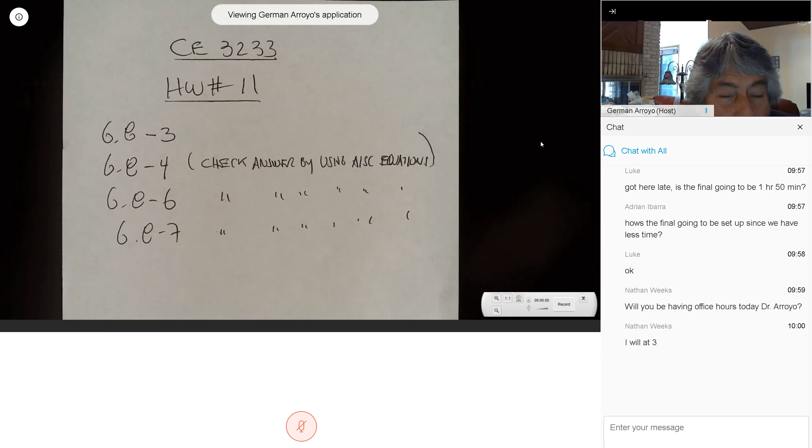So I'm going to give you two problems in the final exam. I am writing the problems, and the problem that will take me the longest to solve, I will give you the longest time. So probably one problem is going to be an hour and 10 minutes, and the other problem is going to be 40 minutes, because we only have an hour and 50 minutes.

I'm going to design the exam for you to take less than that time, but usually some of you are slow. But we had no choice. We had to follow the schedule and the time. I cannot give you more than 1 hour and 50 minutes.

You need to look at the other courses, because many of the professors do not know that the university had changed the date and the time. So there should not be any overlap in your final exams. It shouldn't. But if you have any overlap, go and talk to the other professor, because I was the first one that told you about it. Any question before I continue?

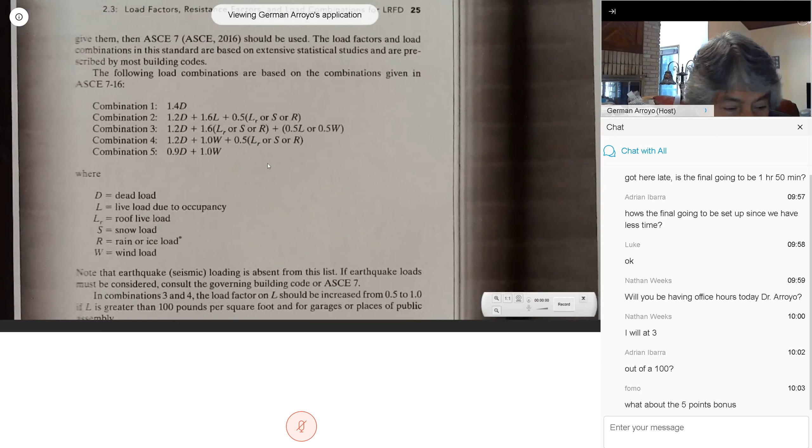One of the homework problems due today gave you the wind uplift. The wind uplift is negative, so in the load combination it goes as a minus. As you probably figured out, for that problem the combination that controlled the design was combination 3.

This is in chapter 2 of the textbook, and I gave you a copy of this page at the beginning of the semester. You're probably already forgetting about that, but for that homework problem, this is the load combination that controls.

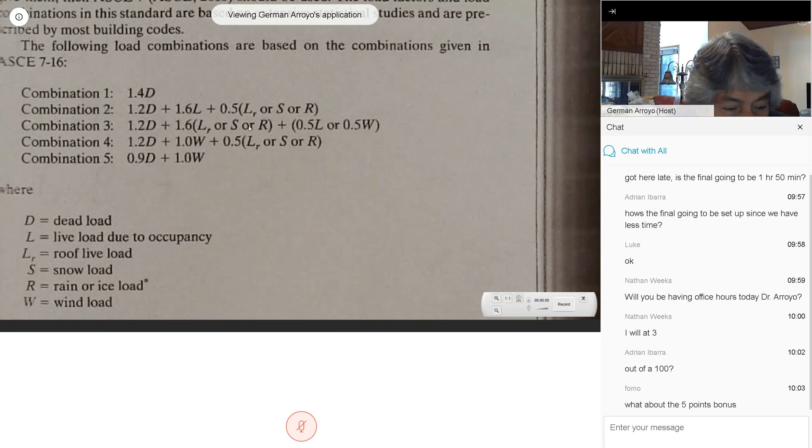You have to be careful, because for instance 1.6 times the live load of the roof, or rain—so here it's 'or'. The same here: 0.5 of the live load or 0.5 of the wind. This could be several cases depending on the loading, but 'or' means you cannot use those two, or three, together. This or that—that's what 'or' means.

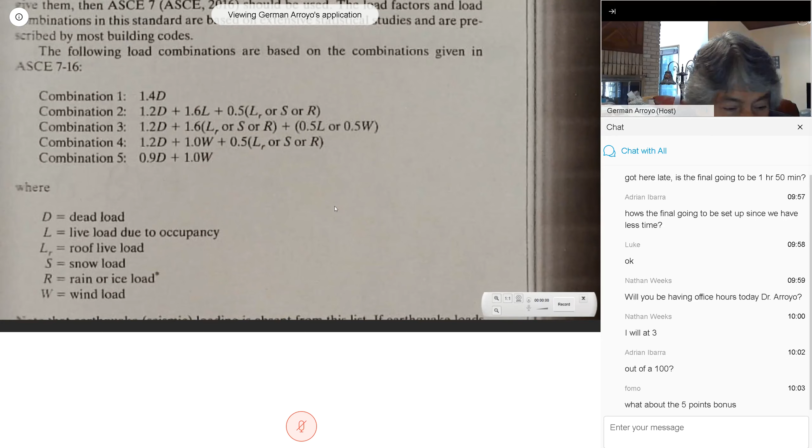So several people asked me about this. I just want you to understand that the wind in this problem is given as a negative pressure because it's trying to uplift the roof in the opposite direction from the gravity load. Don't forget that this is why you have to look at the 5 possibilities. It's not in the code anymore—they removed it—but it's in your text.

I'm going to finish today what we were doing last week, and after that I'm going to start doing beam-columns.

Somebody asked me during the weekend if, for a standard section, you need to compute L sub P and L sub R. If the section is standard, you just go to chapter 3, table ZX, and get the value of L sub P and L sub R from there.

Some of you are taking the course again because you like it, but I didn't teach last semester. Last semester they were computing the value of L sub P and L sub R all the time. If you have a standard section, you just go to chapter 3, table ZX, and find the value of L sub P and L sub R.

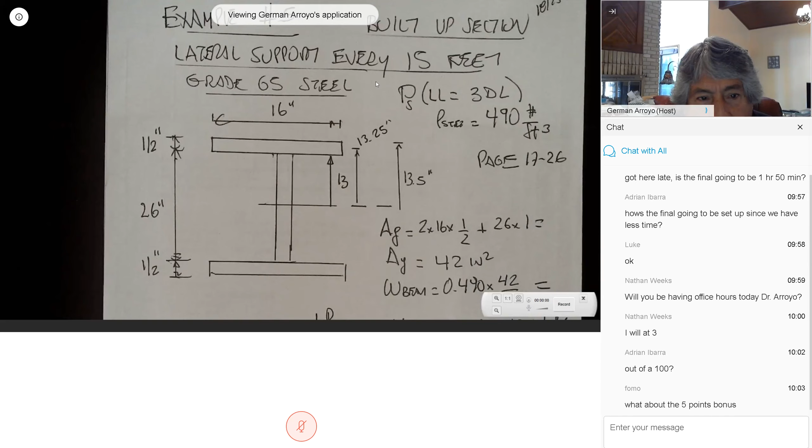This is the last case I'm going to do: a beam with lateral support every 15 feet. I showed this beam before we discussed lateral support. If you compare this problem with the one in the previous chapter, it's exactly the same—the only difference is that now the lateral support is every 15 feet. So the answer, of course, will be different.

But this is a typical built-up section. I know 99.99% of you know this is not in the code, but for the 1% that doesn't, I want to reiterate: this is not in the code, this is not a standard section. So everything needed to solve the problem has to be computed. And this is very simple.

There are 3 plates. This plate is 16 by 1/2. This is 26 by... what was the dimension of this one? Let me see.

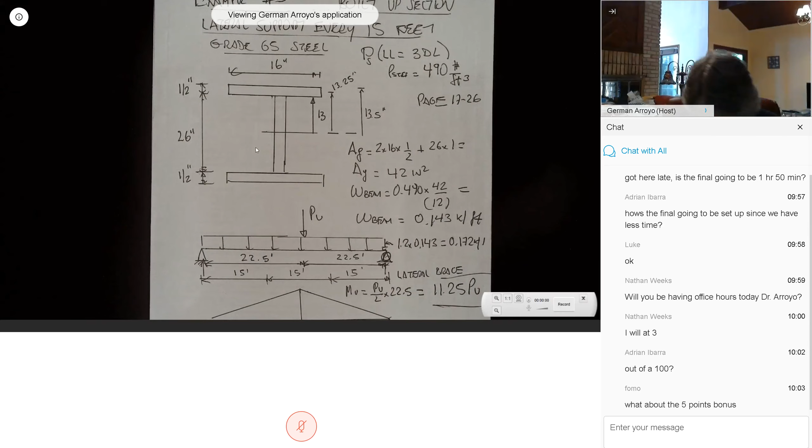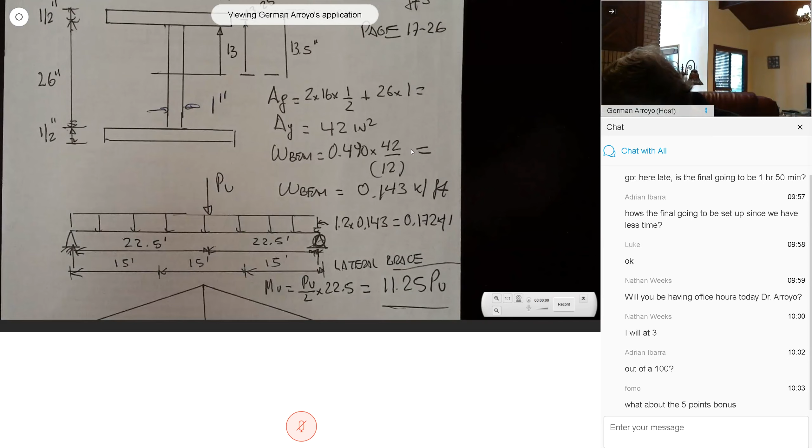Also the thickness of this is 1 inch, of the web. In here, the area in exam number 2, nobody had a problem computing area. This in here is the density times the area divided by, in here there is a mistake, it should be 12 square. The answer is correct, this is 0.143 kips per foot.

So this is the weight of the beam. And in this beam there is a load like before, the PU. So this reaction is PU divided by 2. So the moment is PU divided by 2, but L in here is 45. So this is L sub B, this is L to B, and this is L to B.

We already discussed this before. The critical section is going to be the one in the middle, because of the largest moment, or both of them. MU is the one produced by the point load, and this is the one produced by the weight of the beam. It's a larger moment.

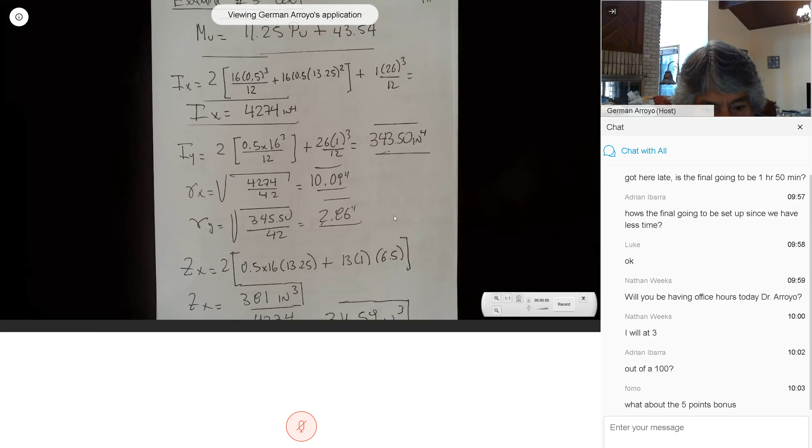I sub X, no problem. A couple of you have problem computing I to X for example number 1, and I don't need in here too many computations, but I do need I to Y. R to X 10.09, R to Y 2.86. This was a new computation, Z X, just to refresh your memory.

To compute this ZX value, we divide this into 2 sections. So it's going to be this area and the distance from the centroid to the neutral axis, times this area and the distance from the centroid to the neutral axis, times 2.

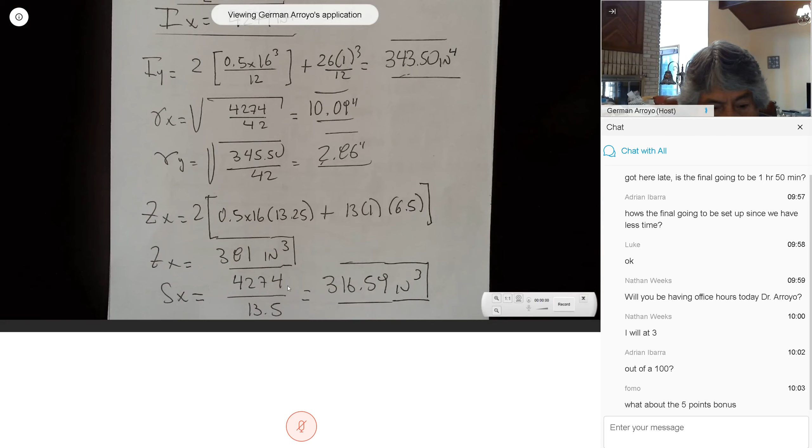And this is what I did the other day. Always, this is the plastic modulus. The elastic modulus is IX over little c, and little c is this value here. For the compression and the tension, the same value.

So what we had in here is the plastic and the elastic modulus. Always this is larger than this value, because like I mentioned the other day, the ratio you get dividing this by this value gives you the reserve capacity, how much the moment will increase when it becomes the plastic moment. And by the way, this number divided by this number is called the shape factor, letter F.

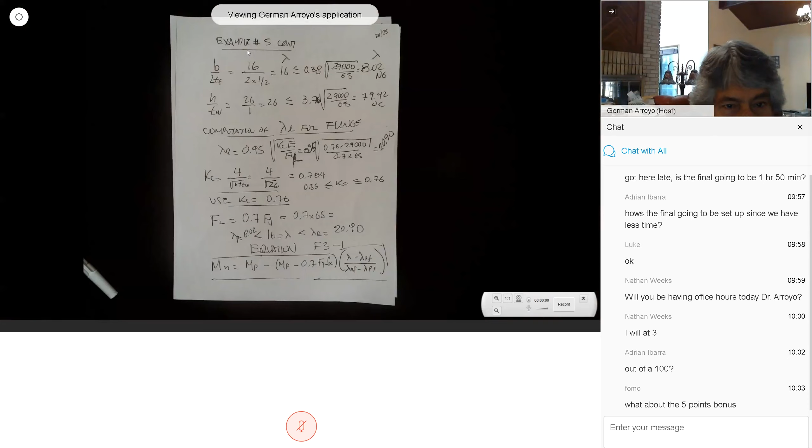We always need to check the flanges and the web. In this case there is the value, the 16 is larger than 8.02, so not good. It means that we had a problem with the flange. If we look at the web, H over TW means that there is no problem with it.

So I was saying the other day, and I want to point out again, don't get confused. They asked me during the weekend about this table. Remember, this table B4.1b is for the beams. The previous one, this table in here, this is for the column.

So for the column, this is lambda, this is lambda sub r. But for the beam, whenever we look at this, with all of this, it's lambda sub p, lambda sub r. So our value of lambda is larger than lambda sub p. We need to compute lambda sub r.

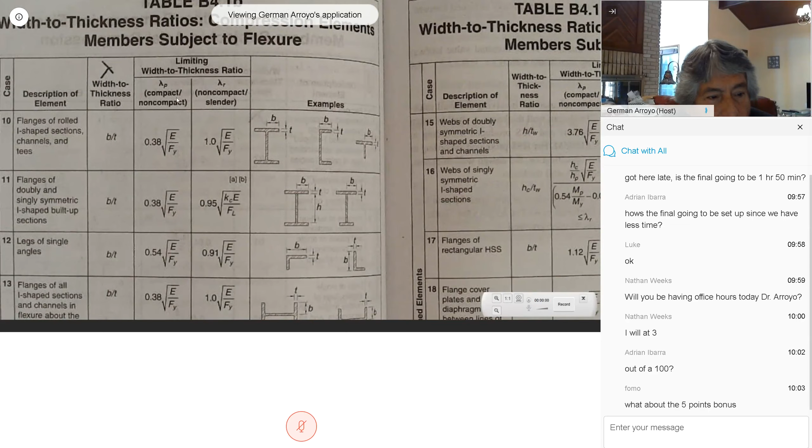But our case is this one, because this is a built-up section. In exam number 2, some people are using the one on the top for the built-up section. This in here is for a standard section. This is for our built-up section.

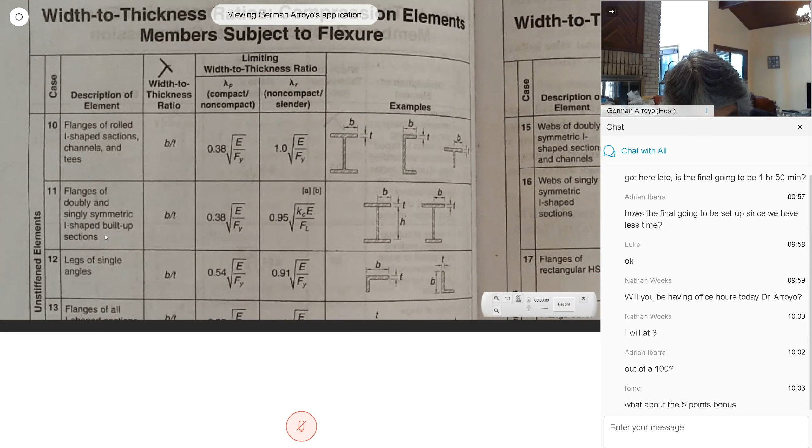So we have to find the value of K sub C, that most of you know where to find it, and the limitation. F sub L is a new value, and I mentioned the other day in here that this is the elastic section modulus for the tension side, and this is for the compression side. I asked you the question the other day and you gave me the correct answer. In our case, because of symmetry, it is equal to 1.

So don't forget that this table is for B. So here on this page, and on page 20, I computed the value of lambda sub r at 20.90. This is the value of K sub C that you computed before.

And so we had our situation that our lambda for the flange is larger than lambda sub P, but less than lambda sub R. So this is the equation that controls our design.

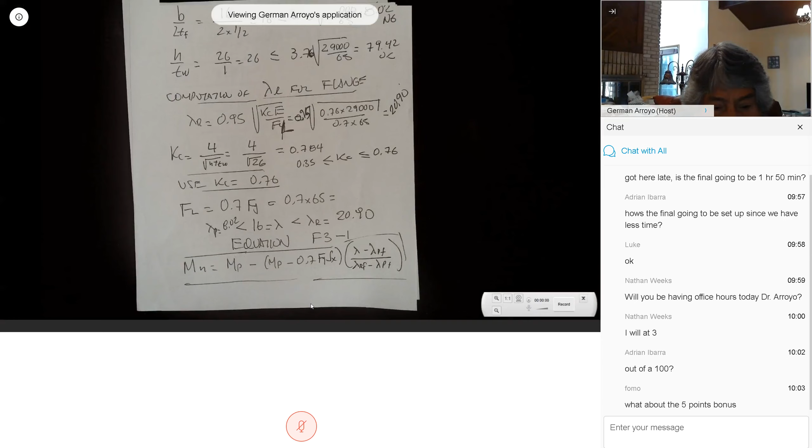And this in the code is page 16.149. I asked you before: don't forget to put in here that lambda sub P is smaller than lambda sub R. This is the formula that controls.

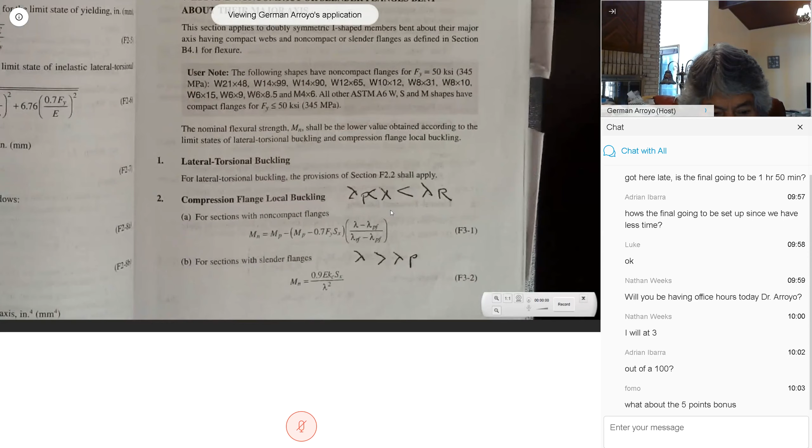Of course, this is going to be smaller than M sub P, because from M sub P you're subtracting all of this value. Be careful with your computation, because sometimes we're not paying attention and it comes out larger than M sub P. It cannot be larger than M sub P because we're subtracting from the plastic moment all of this.

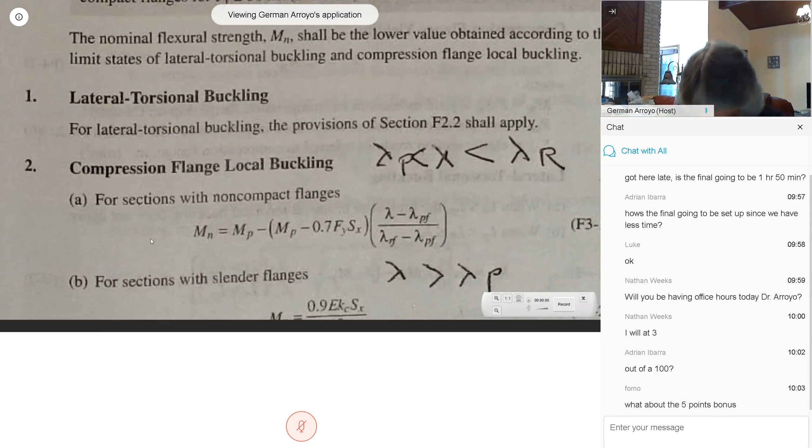I'm going to go back to one of the homework problems, because during the weekend they also asked me this question. One of the homework problems that is due today, this came out larger than lambda sub R.

When you go to the chart and hit the curve that gives you the answer, you're going to see that it's no longer horizontal or a linear equation, it becomes a parabola. So by looking at a parabola, you know which equation controls. But whenever we had the value, like in our homework problem, larger than lambda sub R, it means the elastic equation will control.

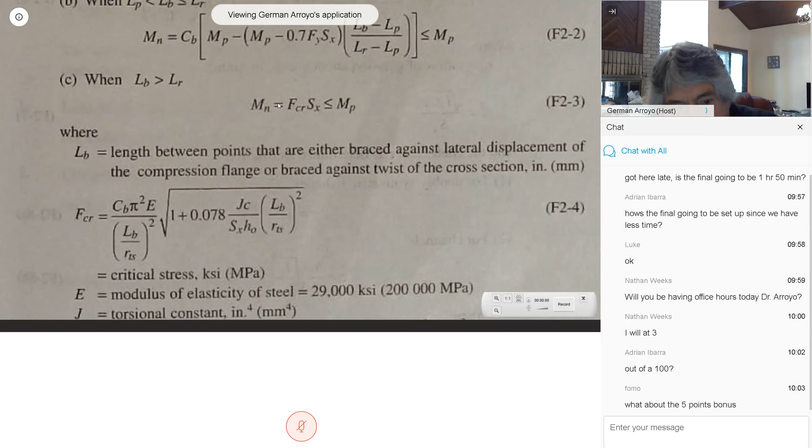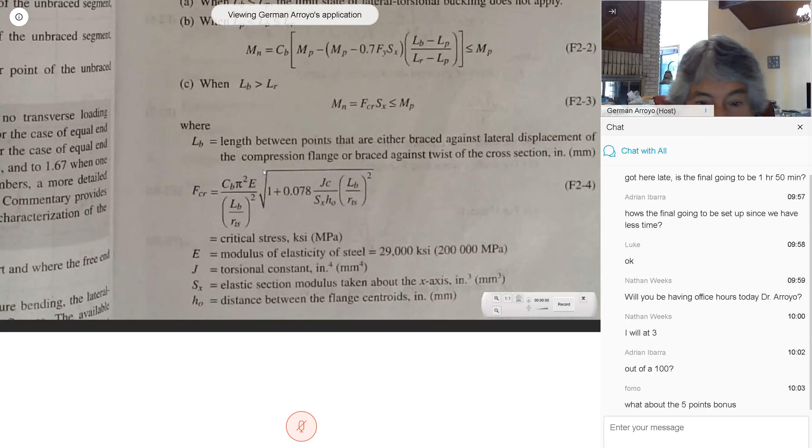Please be careful, because in the past, in a final exam, I gave a problem that requires you to use this equation. This equation's critical stress is computed by using this value, because we are designing a beam. But in that final exam, many people, instead of using this value for the critical stress, they went to the previous chapter.

And they used this equation to compute critical stress. Why for the homework problem can we not use this equation? Why for the homework problem can we not use this equation? Anybody? Because this is for a column, and that is correct.

But in that final exam, many people—I went through the same thing I'm going through today, asked the same question, they gave me the right answer—and in the final exam, they used the wrong critical stress. They went to the back of chapter 4, and they found it not. So just a clarification from the homework problem that is due today. So, what it means...

I do know that you're trying very hard. I just want to share this information with you because it's not only because we had online exams, online lecture, when we were face to face—the same problem I repeated 100 times, and they did the wrong thing.

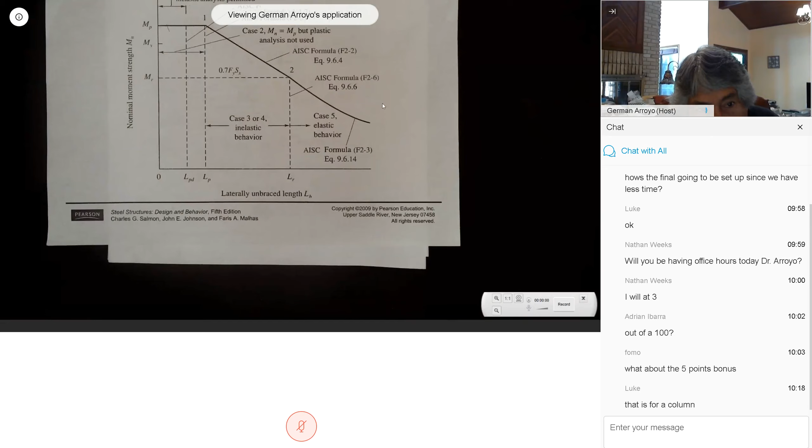So look, whenever we have a beam, laterally braced, there are three equations, and these are plotted for you. When brace length is smaller than L sub P, this equation controls: phi M sub n equal to M sub P. Whenever, as in most homework problems, it falls between L sub P and L sub R, this equation controls—it's a linear equation, and that's the one that uses C sub b.

But whenever we have this equation, when brace length is larger than this value, this is the equation that controls. This is the equation that has the critical stress. So please don't make the mistake. Well, this was just a clarification for some of you.

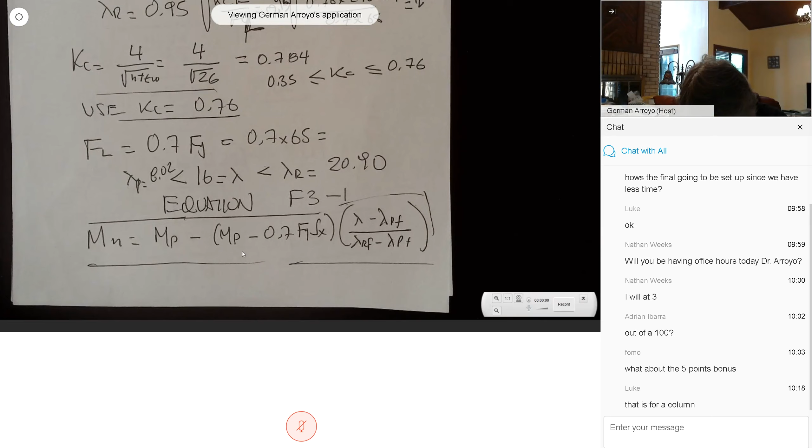This M sub P is not in the code because this is a built-up section. So you cannot find this in the code for a built-up section. But we already have a value: this is ZX times Fy divided by 12.

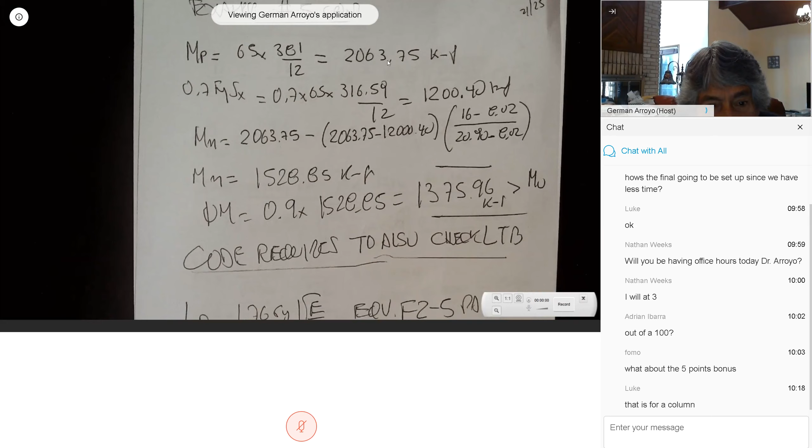This is my plastic moment. M sub R equals 0.7 FY SX. We already computed this value because IX divided by little c—you can see here that it's always larger than this value. Always check your numbers. And this is the nominal design, or the design strength, nominal strength: M sub P minus M sub R, times lambda minus lambda sub P, over lambda sub R minus lambda sub P.

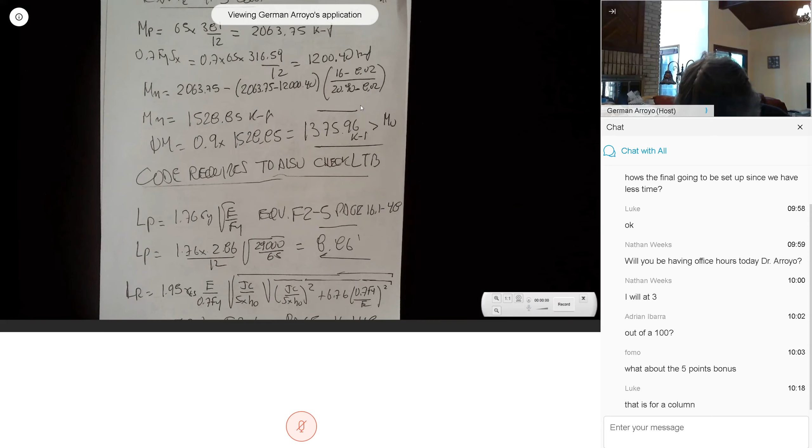And replacing the values in this equation.

So in here, replacing the value, it came to 1528.85. So we have 0.9 times that value, which gave me the design strength, phi M sub N, equal to 1375.96. It has to be larger than M sub U.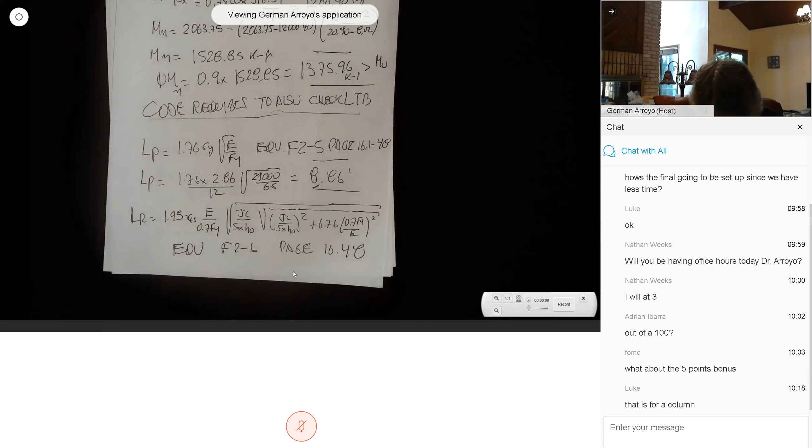So whenever we have a problem with a flange, the code requires you to check lateral torsional buckling too. You have to check it. I'm going to go back to the code.

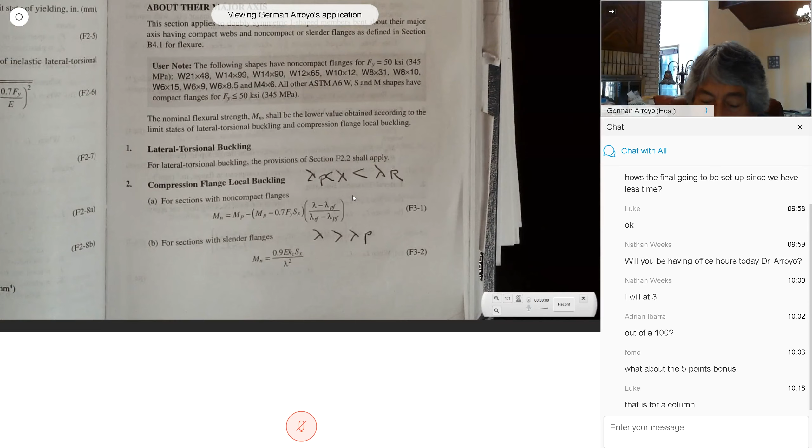16.149. In this page, we have this formula, the one that I just used. But also the code requires that lateral torsional buckling shall also apply. So whenever we have a problem with the flange, we also need to check lateral torsional buckling. We need to check both of them, and the smallest number will control.

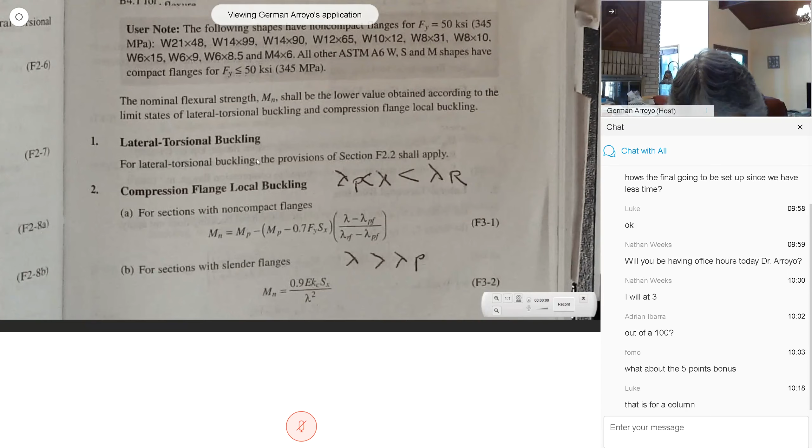Because that means that if this controls, we never will reach this value. So remember, you have to check both of them. It says so in here, but sometimes you forget. In the same example, people did check but forgot about this one, and this one was controlling the design.

So whenever we do lateral torsion buckling, we have to find...

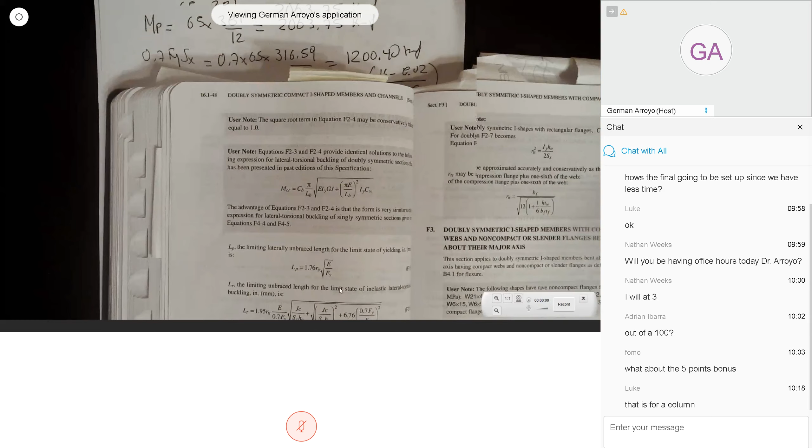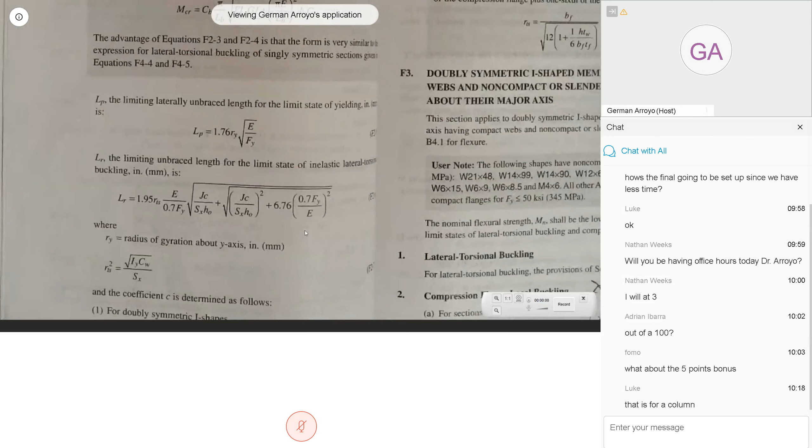And the value, if we are on the same page, the value of L sub R is given in here. And the value of R sub TS is indicated in here. And also the value of C sub W is indicated here. So don't forget that you have to divide this by 12.

A lot of mistakes happen because you do not check your units. So don't forget you need to divide this by 12 because it's in feet. They have to divide by 12 because it's in feet. Last semester, they were doing everything in inches. So be careful. If you have experience from last semester, be careful about this chapter, the last chapter. So 12 and 12.

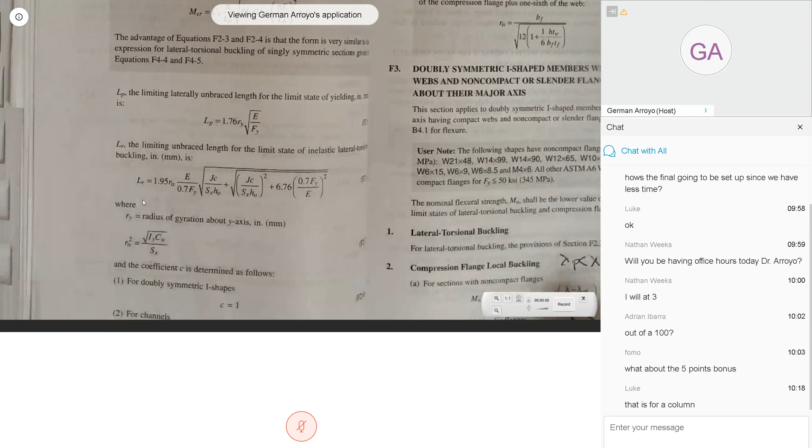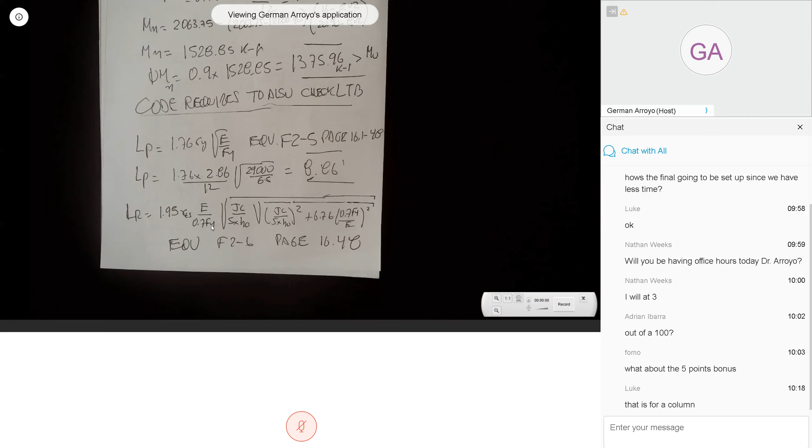So I had computed L sub P in here because we had E, we had FY, we already computed it. In the previous pages, we computed R sub Y, and you have to divide by 12. 8.86. I had to compute L sub R because our value is going to be between L sub P and L sub R. So this is the equation I just showed to you.

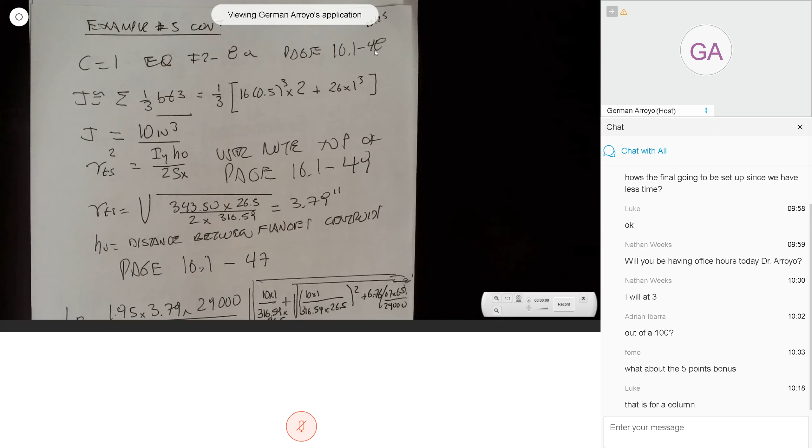This is page 22. The value of letter C is equal to 1. Here's the page where you can find it in the code. This is not in the code. You need to write this formula.

And I know that you're familiar with the formula because some of you used this formula in exam number 2. You were not supposed to use this formula because we had a continuous support, so I don't know why you were doing torsion. No.

So this formula is 1/3 of b times t cubed. I computed this at 10 inches to the cube. This came from the code, r sub ts. We had I sub y. This is the clear distance between the flanges. We had this value, and I put in here also that this is the distance between the flanges' centroid.

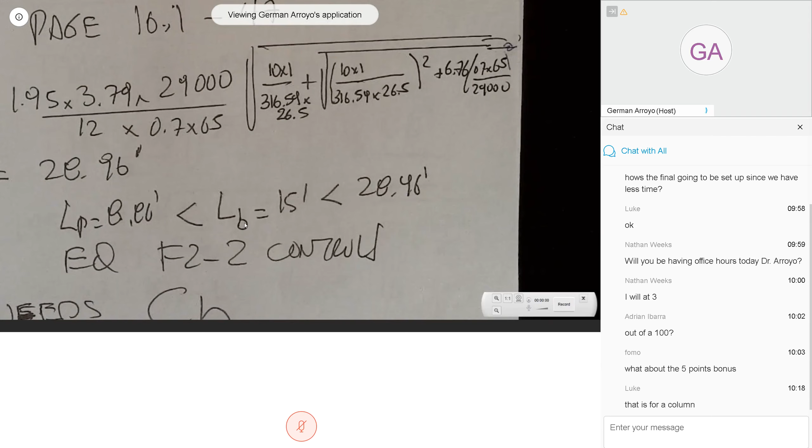And whenever we look at this value, we had L sub R 28.96. So this is the most important thing. The brace length for our problem is larger than 8.86, but smaller than L sub R. So this is the equation of control.

This is what we need to compute C sub B. So sometimes we don't have to waste our time computing C sub B. Only if we have lateral torsional buckling, depending on this comparison, do we need to compute C sub B.

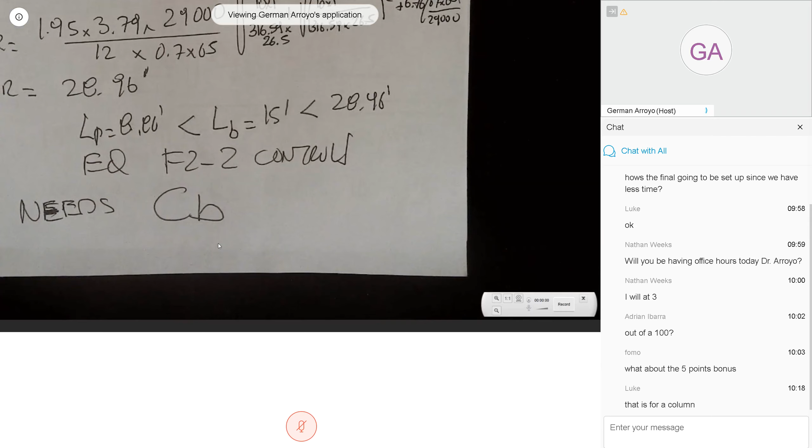Since the center portion of the moment, the center portion of the beam is critical, we have 1/4 at 18.75 from the left, 1/2 at the center, 3/4 because of symmetry is also 18.75 from the right, and our span that we're looking at has a brace length of 15.

So here I'm saying M sub A, because of symmetry, is equal to M sub C. So I had a value of 9.375 pu. I computed C sub B.

And just to give you an idea, sometimes you look at this and you know which value C sub B should be. And here it is about 1.09.

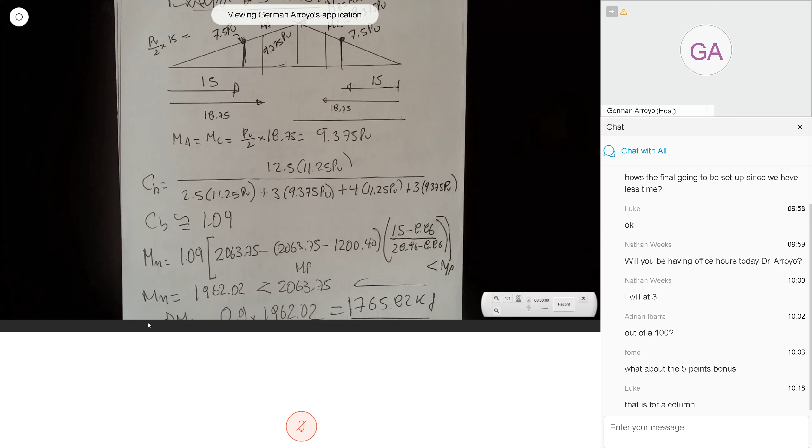I want to show you something that I promised last time and forgot. Go to chapter 3, page 18, so just as a reference, because I want you to do your computation.

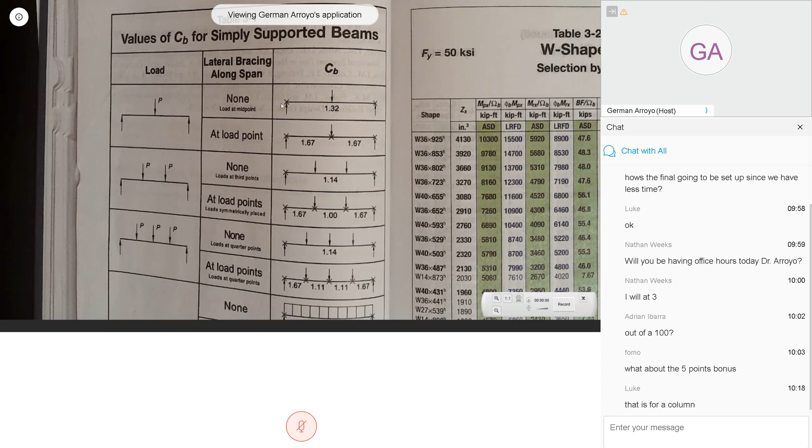But in here, for lateral bracing, it gave you for the load and mid span, with no braces 1.32. So this table is a table that you can use to check your value, the value of C sub B.

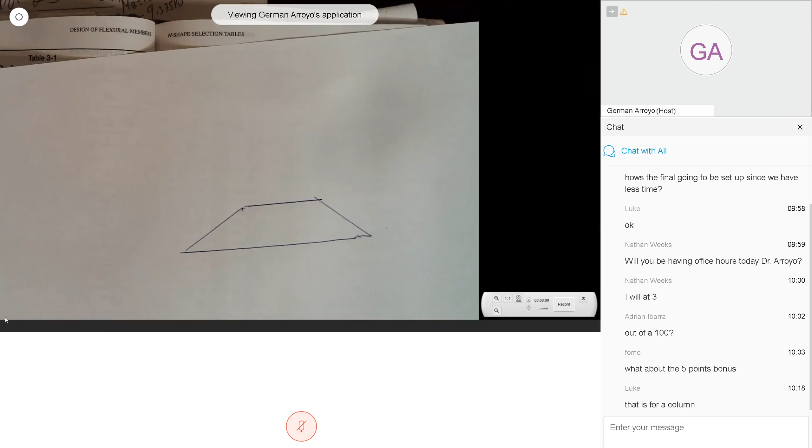If you look at this case, for instance, the moment diagram for this case is going to look like this. So this is the center portion, this is to be equal to 1 because it's constant. That's why in here, if you look at this portion, is 1. This portion, because this is the shape of the moment diagram, non-uniform.

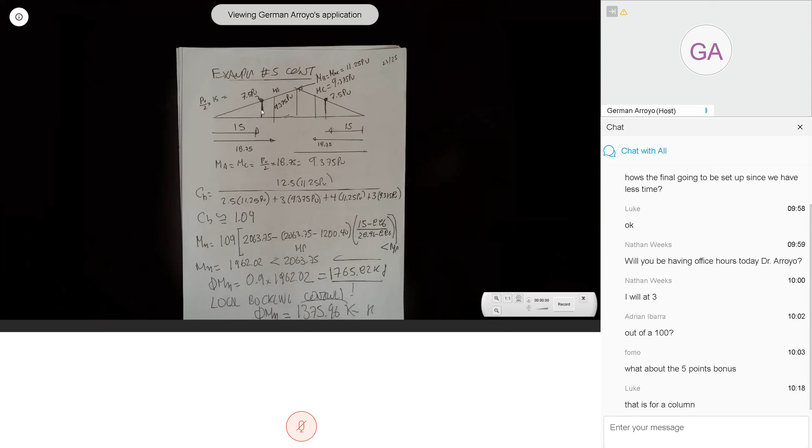This is C sub B, M sub P, M sub P, M sub R. This is L sub B minus L sub P, L sub R minus L sub P. So in here, it came at phi m sub n.

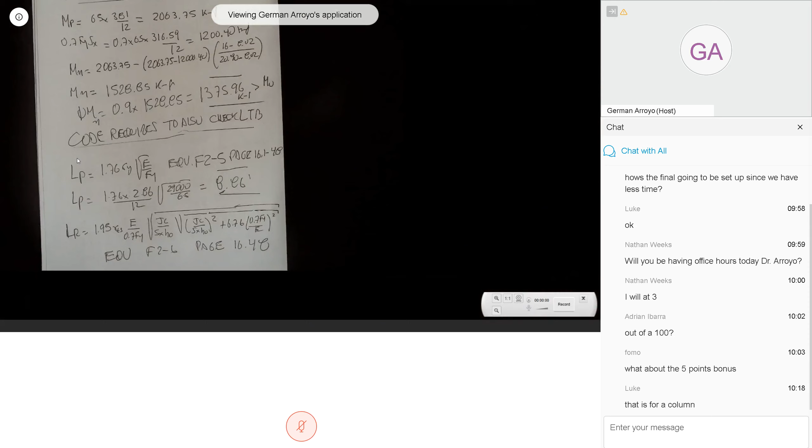1765.82. So if you look at based on lateral torsional buckling, you design a strength of 1765.82. Based on the flange local buckling, the value is 1375.96. So this was the flange local buckling, 1375.

This is based on lateral torsional buckling. Which one is controlling our design? The flange local buckling or lateral torsional buckling? Sometimes it is the other way around, so you have to do both. Since the flange is controlling our design...

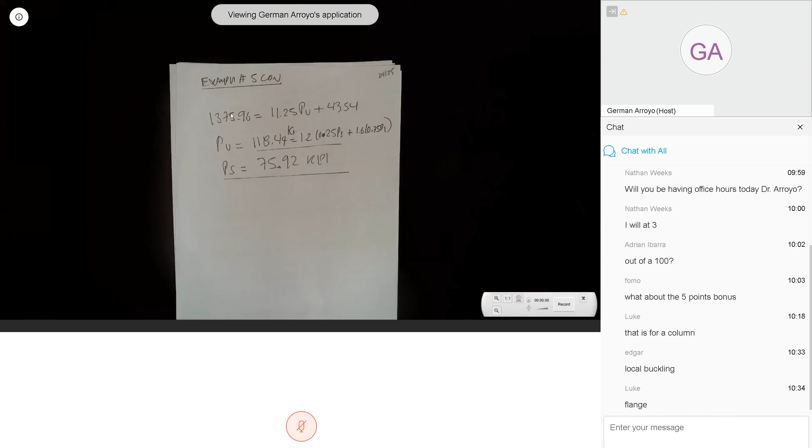We made that moment equal to M sub U. From here, we found PU. And then information of the problem is 25% is the dead, 75% the live.

This is the answer. Do I need to include the weight of the beam for this problem? Do I have to revise my moment like I had done in the past? No, because I already computed the weight of the beam because this is a built-up section.

Any question before I go to the final chapter of this course? Remember, built-up sections, they are not in the code, so based on the geometry, you have to compute what you need. And what you need: I sub X, I sub Y, the gross area, Rx, Ry. For a standard section, they have been computed for you in chapter 1 and also in chapter 3. But you have to compute it here as L sub P and L sub R to see which equation controls this.

So now I'm going to go to the next chapter and the final chapter.

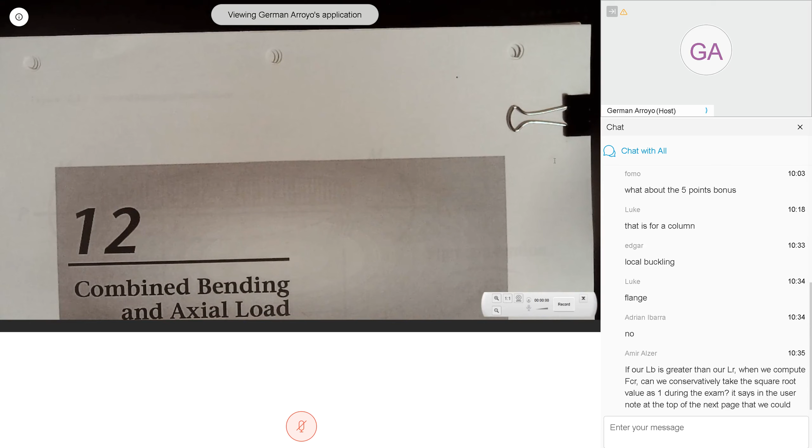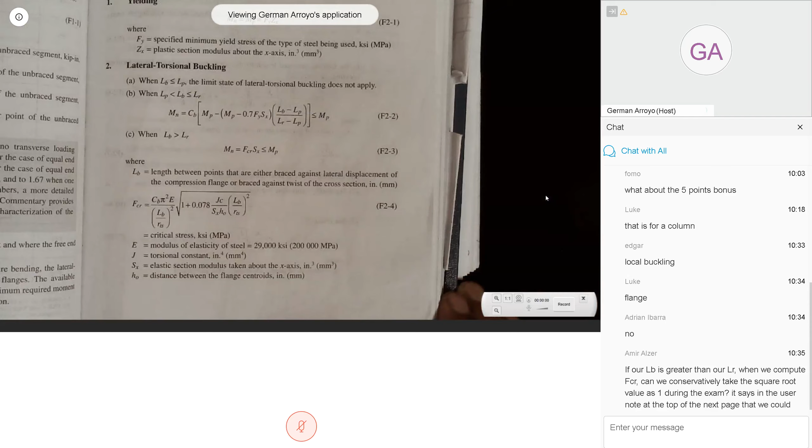Amir is asking about considering C sub B equal to 1 because he says the code said that you can do it conservatively. I'm glad that you read that because I said before that I want you to compute C sub B in this course. Whenever you get your degree, I know you're going to be a great engineer. You can assume C sub B equal to 1 because it is conservative. But here, you're learning how to compute C sub B, always.

Okay, any other question? In the problem we just solved, PS is maximum service load. The question about the service load. So look, this PS is the service load.

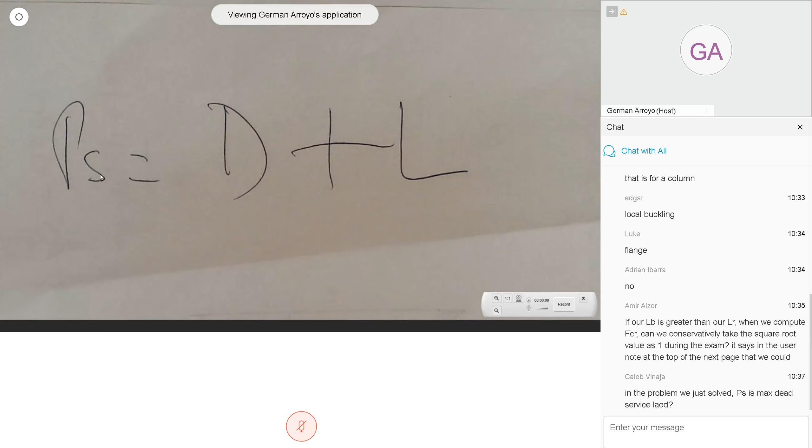And for this service load, the live load is 3 times the dead load. Whenever we talk about the service load, PS is equal to D plus L. So whenever we talk about the service load, a portion of the service load is the dead load, a portion is the live load. So the PS in this problem stands for the total service load, which is the dead load plus the live load, and the live load is 3 times the dead load. Any other question?

This page comes from our textbook, but what we're going to be looking at is combining the bending and the axial load. In general, it could be bending combined with tension or compression. In our case, it's going to be combined bending and compression.

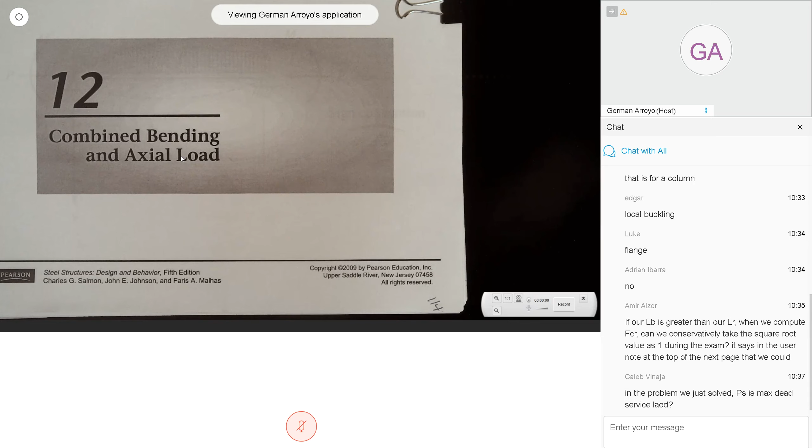So if you remember from mechanics of solids, I think some of you took that course last semester, we learned about stresses: axial stresses, shear stresses, bending stresses. But the bending stresses and the axial stresses are called normal stresses. Just to give you an idea, something that we know and you also know: if this is a typical wide flange, bending stresses.

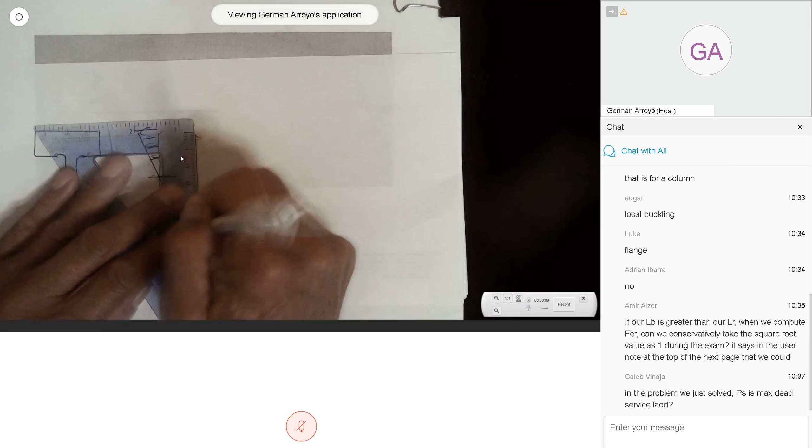So normally, this is letter C, the normal stresses. It means that this point, that point, all of these points have the same stress. The stress here, sigma, is equal to MC over I, and the stresses are perpendicular. They're called normal stresses. Bending stresses are normal, perpendicular to the cross section. This stress here is acting perpendicular, normal stress.

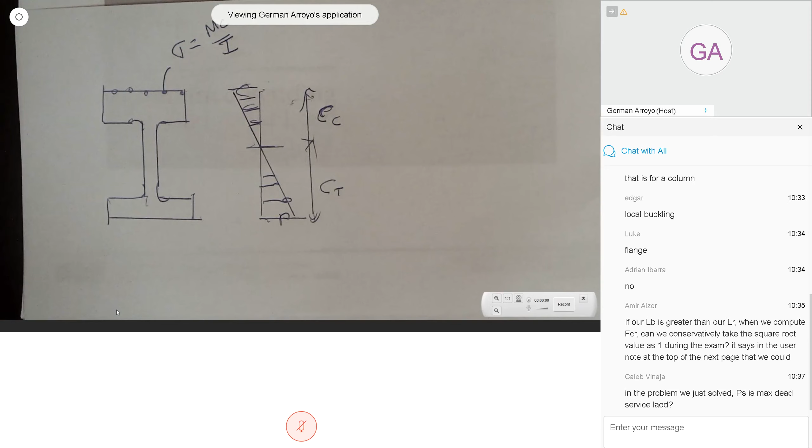So if I had this situation, plus an axial load, I'm going to put an axial load in compression. All of these stresses, sigma, are the force over the area. Using compression, all of these stresses are uniform, and it's the compressive force divided by the area. So whenever I want to find the stress at this point, the stress is going to be equal to MC over I plus C over the area.

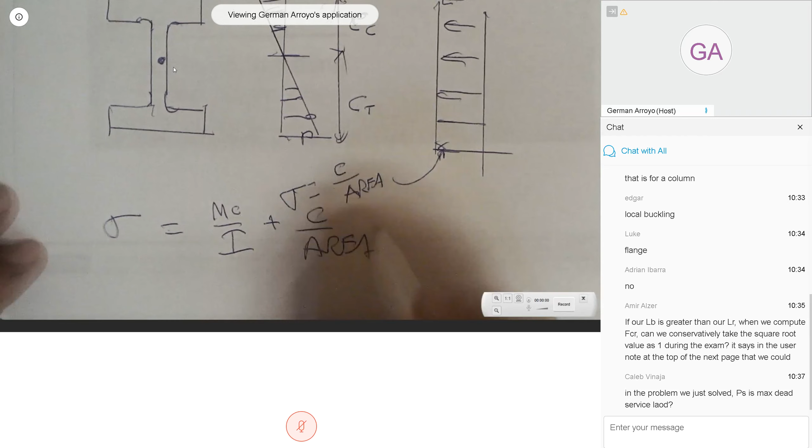So whenever we look at the stress at this point, it's this plus this. We add the stress due to bending, M C over I, and the stress due to compression, C over the area. So what happens if I do the same at the bottom? What's going to happen with this formula? If I do this one and this one, what's going to be the difference between the sigma at the top?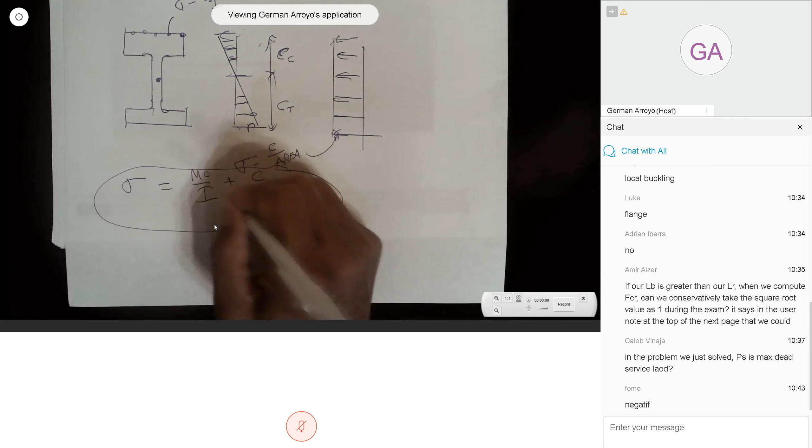Negative. So in mechanics of solids, we show you there's a plus or minus. What is important to remember is that when you add the stresses produced by bending and the stresses produced by compression, the maximum you can use is the full capacity of that section. So you cannot use 150% of the capacity, everything is limited to the full capacity.

So you're going to see that the code does this in a very similar fashion, but they put smaller than or equal to 1. Why did they put smaller than or equal to 1 in here? Why do they use this equals to 1 in the code? Anybody? Any answer?

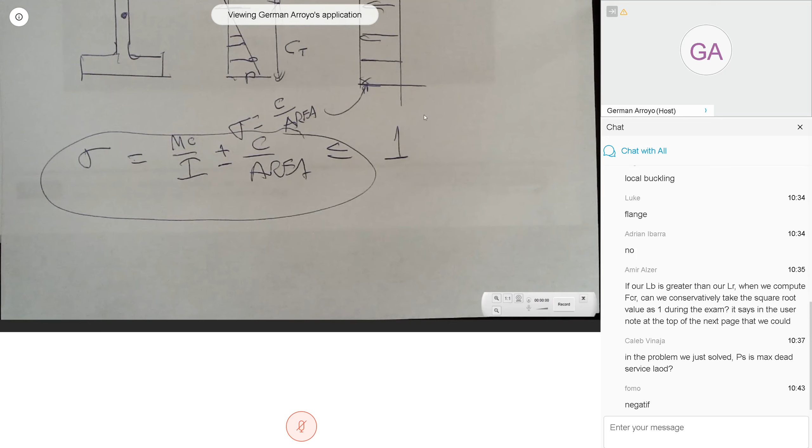Okay, well, you don't know, because we cannot have more than 100%. So this means that we're using the bending capacity and the capacity due to compression cannot exceed 100% of the capacity of that section. This is what they mean. They're going to write the equation a different way, but you have to always remember this.

So there is going to be a capacity due to bending, phi M sub n. There's going to be a capacity due to the axial load, phi P sub n. And the capacity that we use with bending and compression cannot exceed 100% of the capacity to resist the load of this cross section. That's a simple way of putting what we're going to see.

So in the old textbook this used to be chapter 12. But this is combined bending and compression. And whenever we look at this, this is the situation that we're going to be looking at.

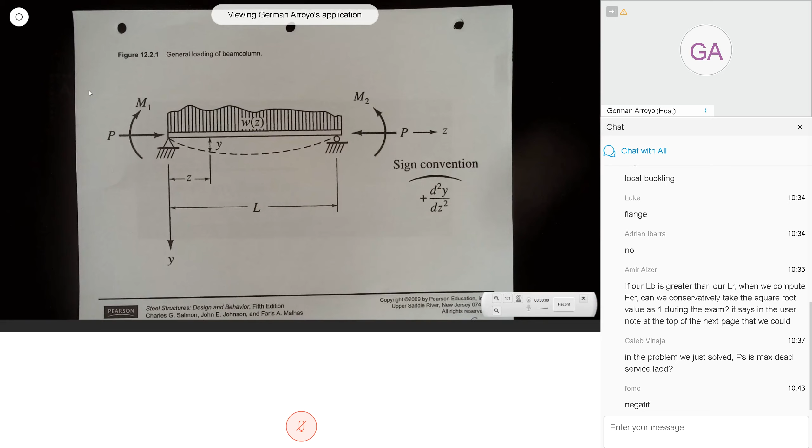I want you to look at this very carefully. This is called a beam column. So from now on, we're going to be making reference to the design of a beam column, because it behaves like a beam and behaves as a column. So everything we learn about a column is going to be applied to this. Everything we learn about a beam is going to be applied to this.

And the way you did your homework, if you have a question, I know that you understand the difference between a column and a beam, and I know you know how to design a column, you did it for the exam. You know how to design a beam because I've seen how you solve the homework problems. So this load is producing bending, a bending stress. This is a moment also producing bending stresses. Sometimes we're going to have only this producing bending.

Sometimes we're going to have only this producing bending, but we have to have an axial load to produce compression. So this is the typical beam column.

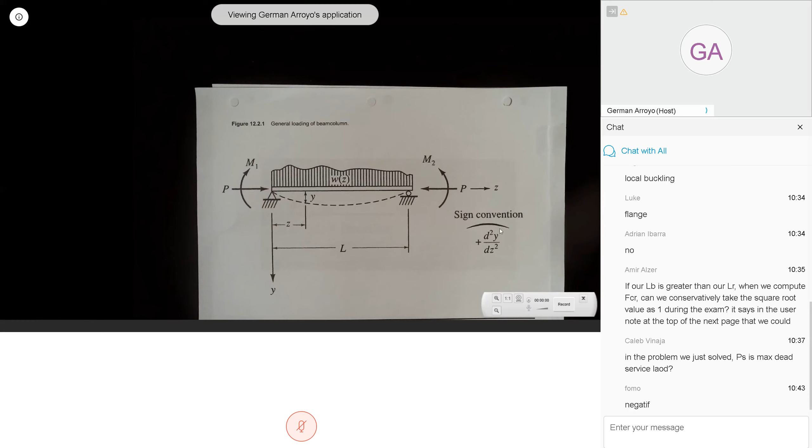And whenever we look at this, there's going to be a span, there's going to be lateral bracing, and also we're going to have unbrace length, the same that we done for a beam. We're going to do it here, the same we done for a column.

But what's important to understand here is that there's going to be this deflection due to the load. It's going to increase due to the axial load. Because whenever you put axial load, this member is going to try to buckle, and the buckle is similar to a deflection.

So now we're going to have an increase in the bending moment due to this axial force having some eccentricity. So there's going to be a primary and a secondary bending moment. The secondary bending moment is going to be called P times the little delta, because P times the large delta, that is the lateral movement for a frame, that's the side sway. So it's P times the little delta.

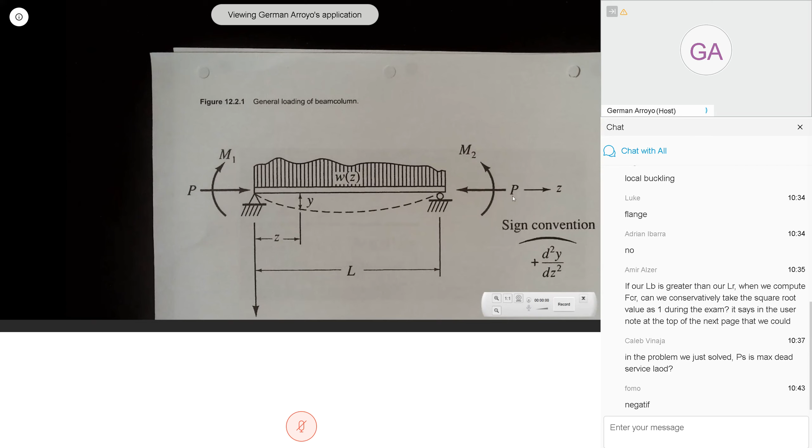To make things easier, they had removed the moments at the end. They call them the primary and secondary bending moments. So there is a primary bending moment produced by the given loading, and there's going to be a secondary.

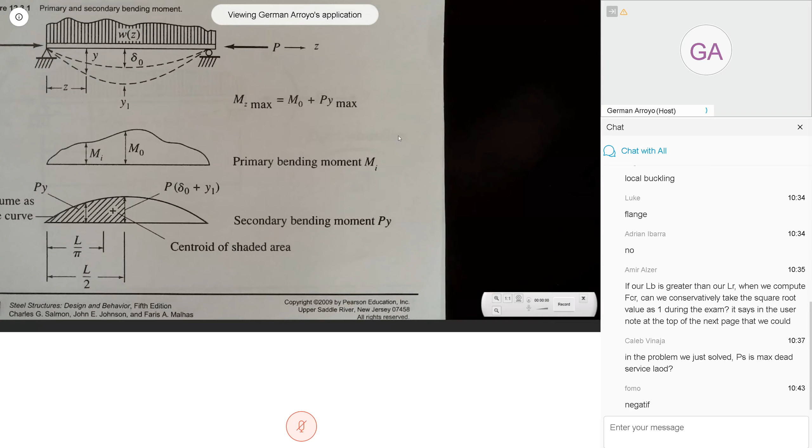You see, you have here the primary due to the bending moment, and the secondary due to this load times the eccentricity Py. So the secondary bending moment is going to be handled by the code by increasing the primary moment. This moment is going to be multiplied by a magnification factor.

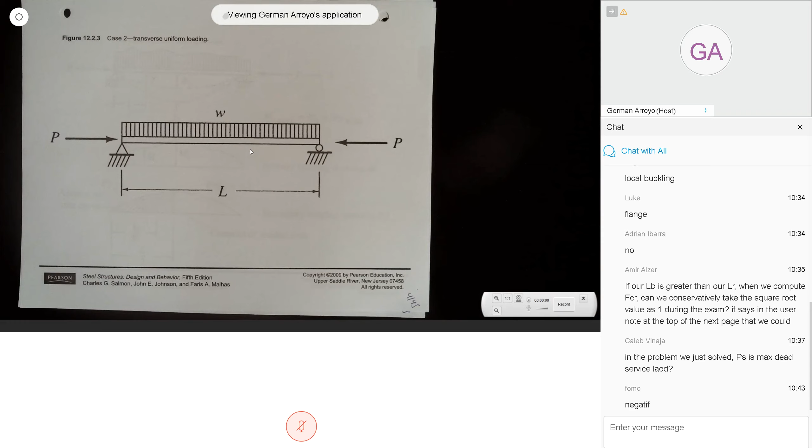This is going to be one of the typical problems. We had an axial load, we had a uniform load. You have to be very careful, because in the final exam, like in the previous exam, I gave you the bonus that had a tension member and eccentric load. You had to look at the load and determine what is this load doing to my member.

And here I had a bending moment, an axial load that produces a secondary moment, but what I have is a beam and a column. So this is called a beam column.

I'm going to stop here because tomorrow we have a long day. Tomorrow is going to be very important. I'm going to go over how to solve this problem, and it's going to be different than the way the solution manual does it. So I'm going to show you step by step how to do it.

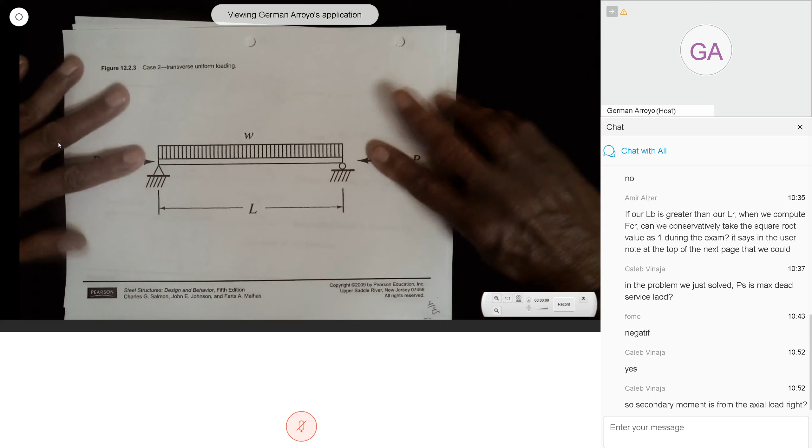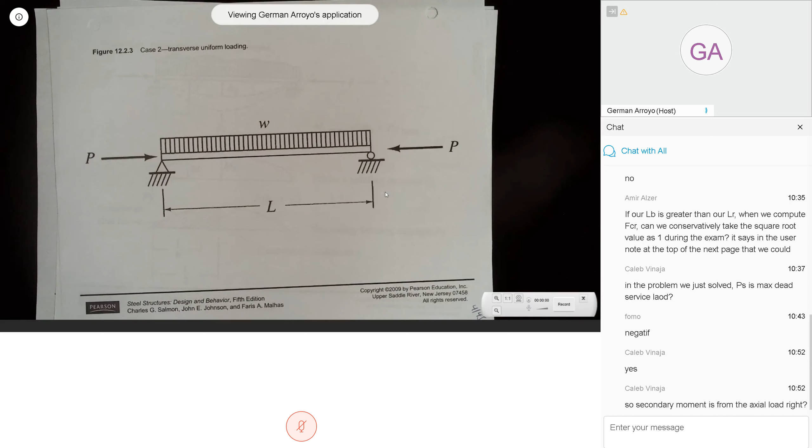If you ignore this load, we're going to have a deflection. If we put this axial load, this is going to bend due to the axial load. This is what we call buckling. So the buckling is going to increase the deflection. We're going to have this force times this deflection. That would be the secondary bending moment. But it's going to be handled by magnifying the original moment. Exactly, from the axial load times the secondary.

You don't need to compute the deflection because the code is going to give you a magnification factor. It will take care of that.